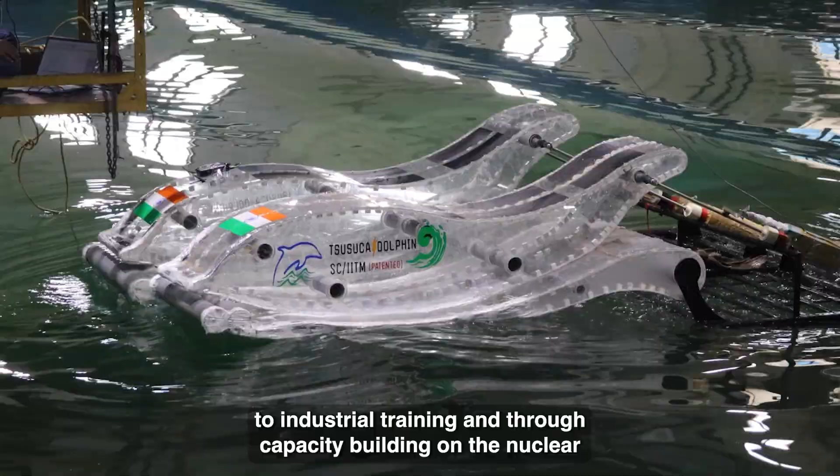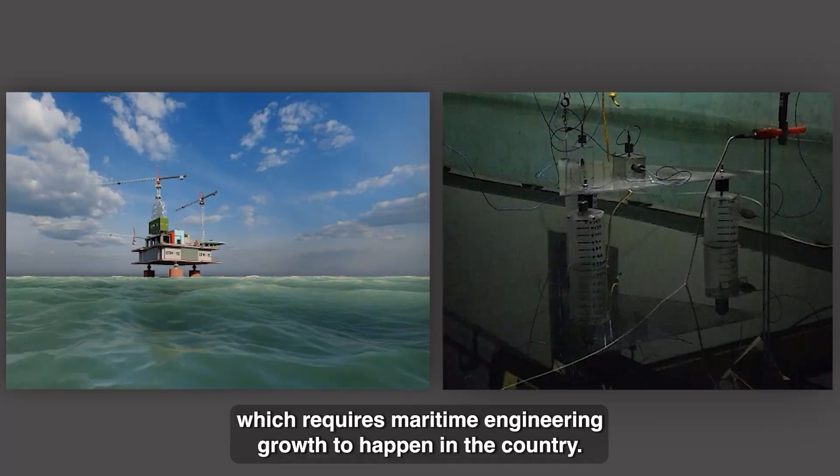This Maritime Engineering program is a very special multidisciplinary program with input from mechanical, civil, structural, aerospace, naval architecture, chemical engineering, electrical, electronics, and applied mechanics. This program is completely different, dedicated to industrial training and thorough capacity building on the new trade of the maritime sector. It's a growing economy which will give a lot of job opportunities and research frontiers as India grows, and the Blue Corridor effect planned by the Government of India is one of the important missions which requires maritime engineering growth. This program caters to that expected capacity building.

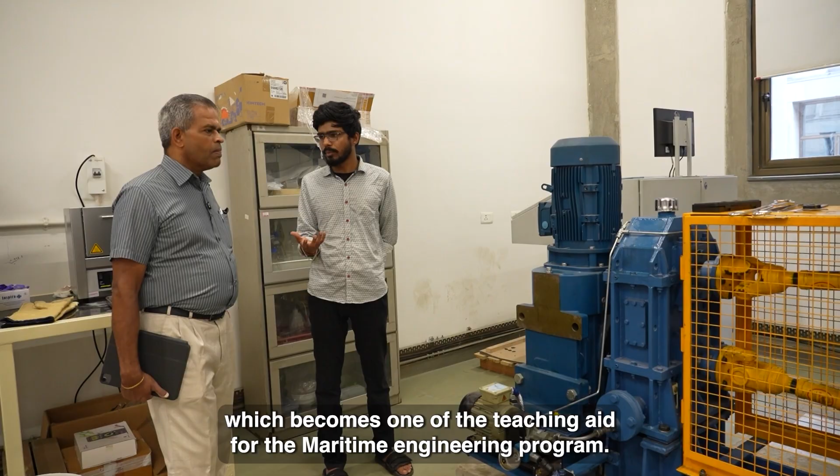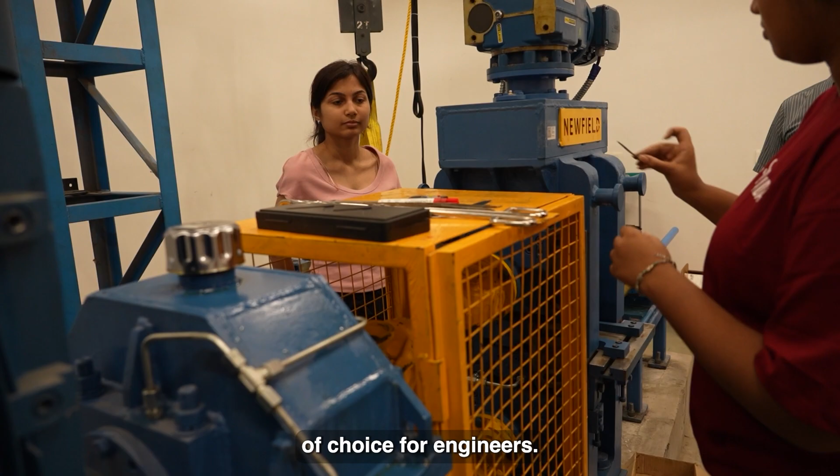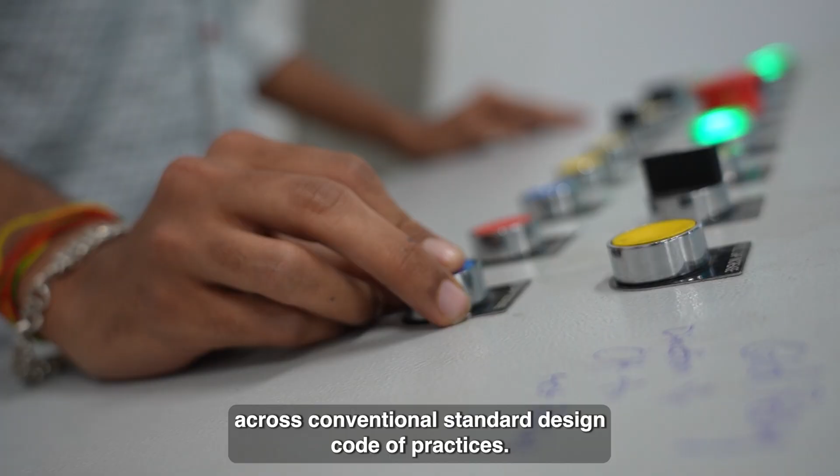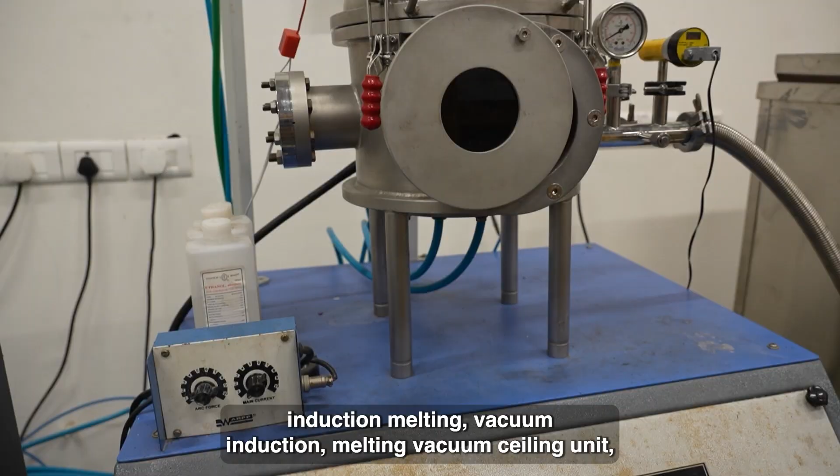This is part of the material science engineering laboratory which becomes one of the teaching aids for the maritime engineering program. When we talk about materials innovation in the maritime industry, concrete and steel have been conventional choices for engineers, but we also have titanium vessels and high-speed craft boats made of fiberglass. These are advanced materials that do not fall under conventional standard design codes of practice. We conduct box furnace tests, tube furnace tests, vacuum arc melting, induction melting, vacuum induction melting, and vacuum sealing, all present in this small segment of the material science laboratory.

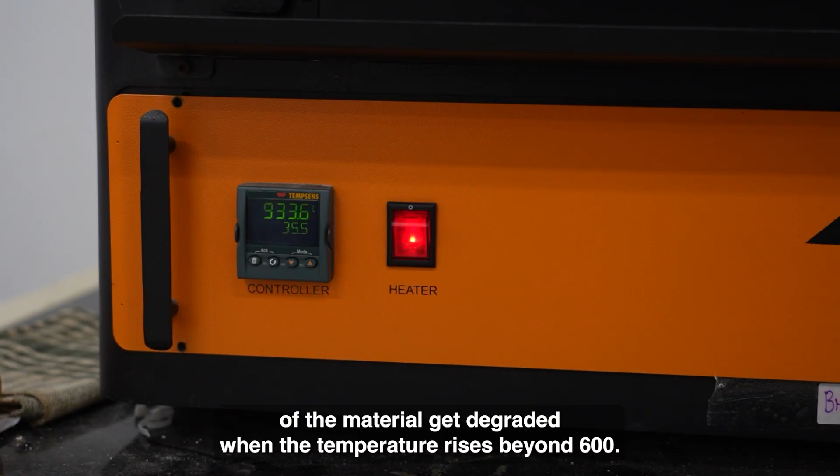A typical furnace's operating temperature for testing specimens can go as high as 1200 degrees Celsius. Generally at room temperature and ambient conditions, mechanical properties will not alter much, but as you'll see in the course lectures, the strength of the material degrades when temperature rises beyond 600 degrees. Therefore, for fire resistant design, you must choose an alloying element such that the strength doesn't degrade beyond 600 degrees Celsius.

Welcome to the ambience of IIT Madras Lecture Theatre. This is one of the interesting classrooms where maritime engineering classes will be conducted. We have state-of-the-art projection facilities and good audio-visual recording systems. Once the lecture is over, we can generate PDF files directly and email them to your email IDs. It's a state-of-the-art facility where lectures are recorded for a lifetime and shared with students immediately. This is the IIT Madras library.

The library has collections of books referred to as standard textbooks and references for the course and program. It also has a lot of online editions of design codes of practice and reference materials, plus e-collections of various video lectures from international courses and programs related to maritime engineering.

We will be taking you around to the advanced material manufacturing units, so you will have state-of-the-art facilities available at IIT Madras. Welcome to the program to join MTech and PhD at IIT Madras Maritime Engineering. Please try to enjoy and take advantage of this to the maximum. Welcome to the program and welcome to IIT Madras.

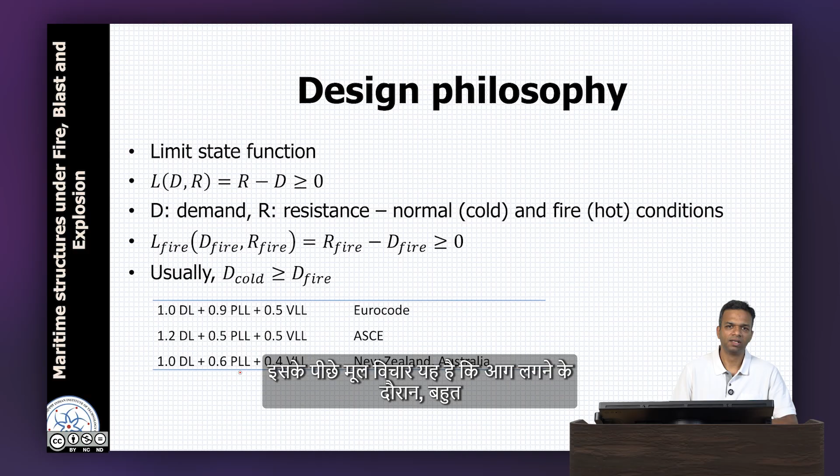Several building codes specify the partial load factors for fire limit states, and the main thing to notice here is that for permanent and variable live loads, the factors are generally lesser. The basic idea is that during a fire, a lot of combustible items begin to burn, and hence their mass, which was acting on the structure earlier, is no longer there. Hence the overall load reduces.

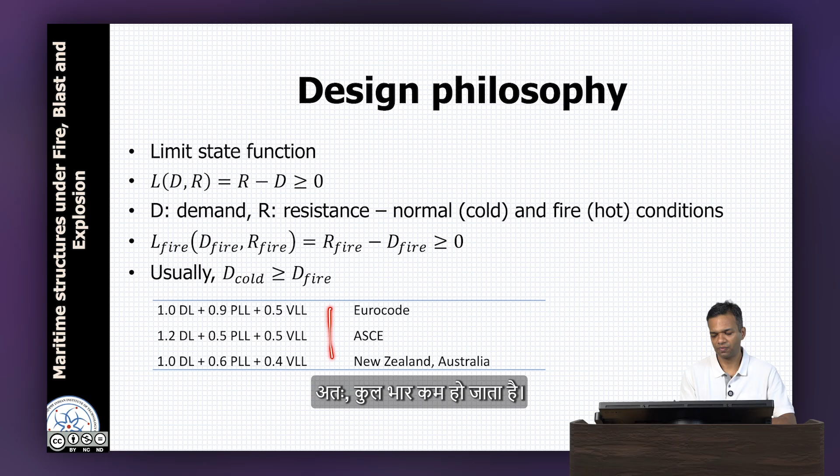So the design under fire scenario entails the following things. One is reduction in load demand. This reduction happens because combustible items are getting burnt away. Also, people living in the building would have been evacuated before the fire intensifies. After the fire intensifies, which is the post flashover stage, it becomes important from a structural point of view.

Then there will be additional internal stresses or strains due to thermal effects. We saw that a member can expand, and if restrained, this expansion leads to additional stresses. These additional stresses may cause yielding as well as buckling. For non-uniform exposure, it can cause thermal bowing or curvature due to thermal effects.

Then we saw that generally the strength of materials reduces with increase in temperature. We have seen this in detail for steel structures. In this lecture, we will consider concrete as a material, and we will see how material properties of concrete change with temperature.

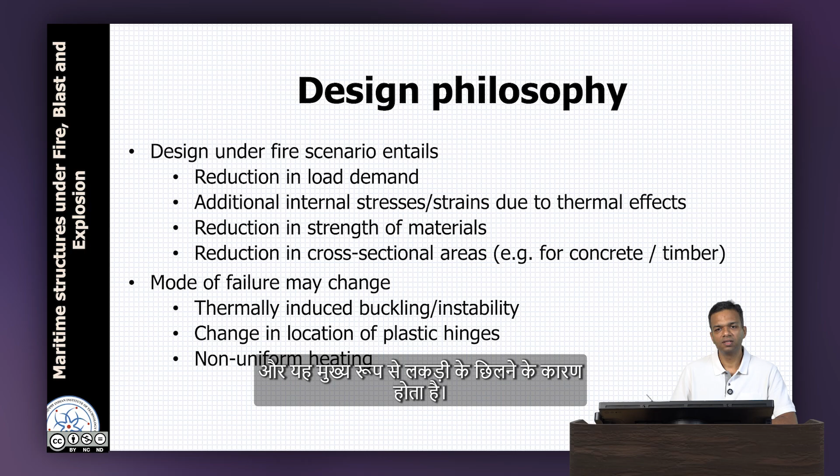One very important aspect for RCC structures is that there can be a reduction in cross-sectional areas, and this predominantly happens due to spalling. So if we have an initial cross-section of a beam like this, exposed to fire on 3 sides, which is a typical fire exposure condition for beams, then some parts of the concrete which are exposed may spall. What I mean by spalling is that chunks of concrete can fall away.

Why does this happen? This happens due to pore pressure. Any concrete has some amount of moisture content within it, which at room temperature remains in liquid form, whether it is physically attached water or chemically attached water. At higher temperatures greater than 100 degrees Celsius, typical for fire situations, this liquid water becomes vapor and tries to expand significantly. Because of this expansion, it exerts tensile stresses within concrete, and concrete, being weak in tension, undergoes tensile cracking, and fragments of concrete can spall off. This is where reduction of cross section can happen for concrete structures.

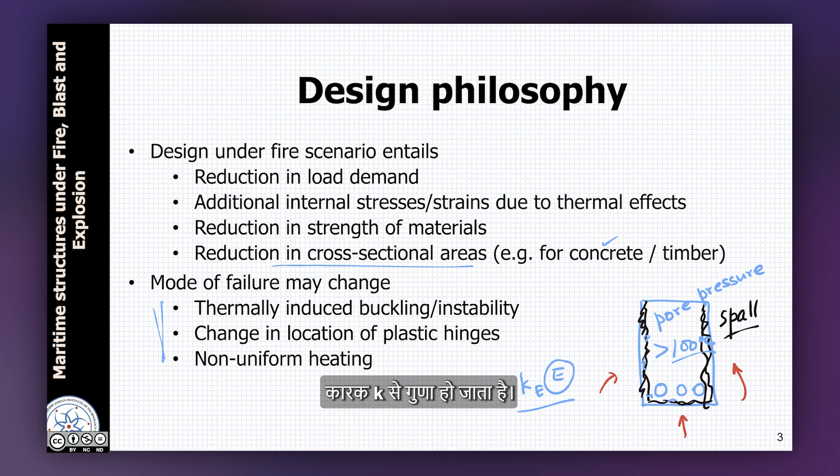All right, so let's move on to material properties of concrete. First, we are looking at concrete under compression, because compression is the main load carrying capacity component which comes from concrete. This particular table is coming from the Eurocode. In the first column here, this is the concrete temperature. As of now, the two columns we will look at are the second column and the fifth column, which is a ratio of Fc theta divided by Fck.

Now Fck, as you already know, is the characteristic strength of concrete, and Fc theta is the strength at a temperature theta. So what we are implying is that Fck, when we say characteristic strength, this is at room temperature, or depending on lab conditions, generally considered to be 20 degrees or 25 degrees.

The other differentiating factor is the nature of aggregates. This particular set of columns is for siliceous aggregates, and this particular column is for calcareous aggregates. Siliceous aggregates, as you would know, is silica based, so this has mostly SiO2. Some examples of stones whose crushed fragments become siliceous aggregates can be quartz or granite. Calcareous aggregates are based on calcium carbonate, calcite being an ore of calcium carbonate, and a very common aggregate which is used and is calcareous is limestone, or rather fragments of limestone.

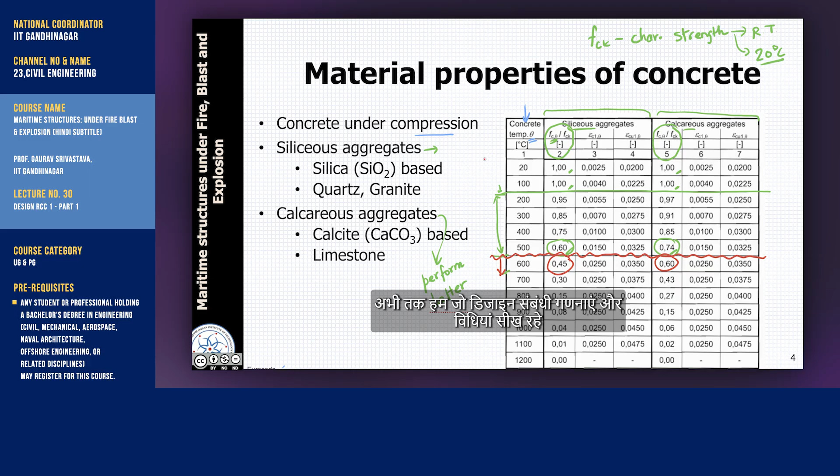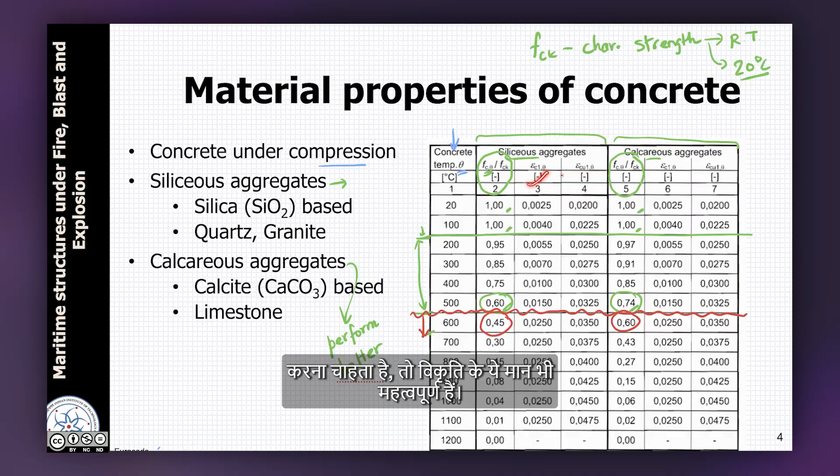Now this table has two other columns giving strains. These will become useful when we are interested in the stress-strain graph of concrete. For the design calculations and methods we are learning, as of now it is not required, but if one wants to do advanced calculations with respect to concrete structures, then these values of strains are also important.

Now, concrete, although it has very low strength in tension, still has some strength. So generally for most design we do not consider the tensile strength of concrete. However, if it is necessary in any application, the Eurocode also gives the variation of the ratio of tensile strength. This KCT is the ratio of concrete tensile strength at temperature theta divided by the concrete tensile strength at 20 degrees Celsius, or room temperature.

Here also you will notice that up to 100 degrees there is no change in strength, and this is predominantly governed by evaporation of water. After 100 degrees there is a linear decay - obviously experimental data will be above and below this, but this is a general regression line. And if we were to draw a line at 50% of the strength, we see that at less than 400 degrees, the tensile strength reduces by more than 50%.

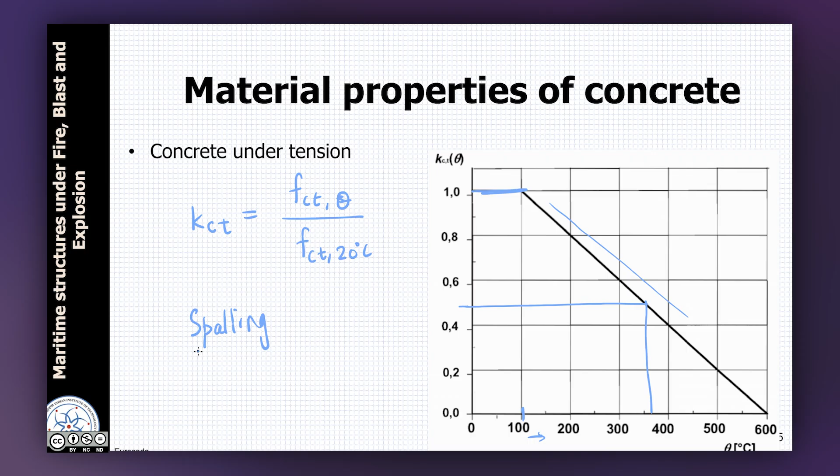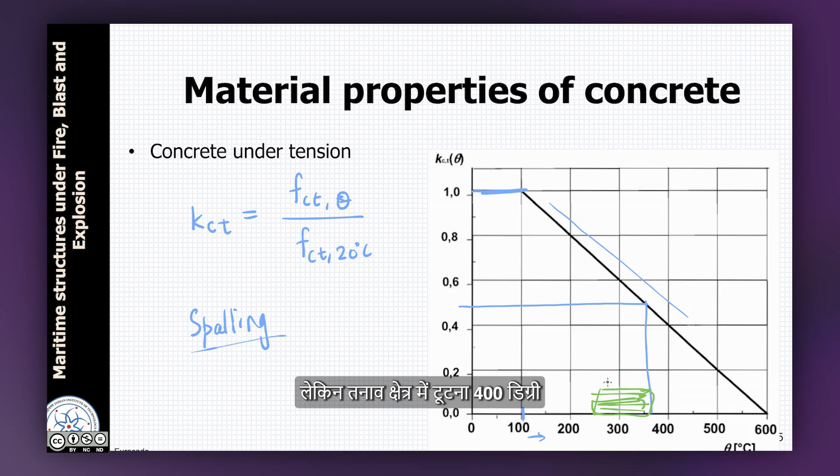So for this reason, spalling can initiate even in the early stages of temperature exposure, because the tensile strength is dropping very fast. So even though the concrete may continue to carry load, tensile zone spalling can begin much before 400 degrees Celsius.

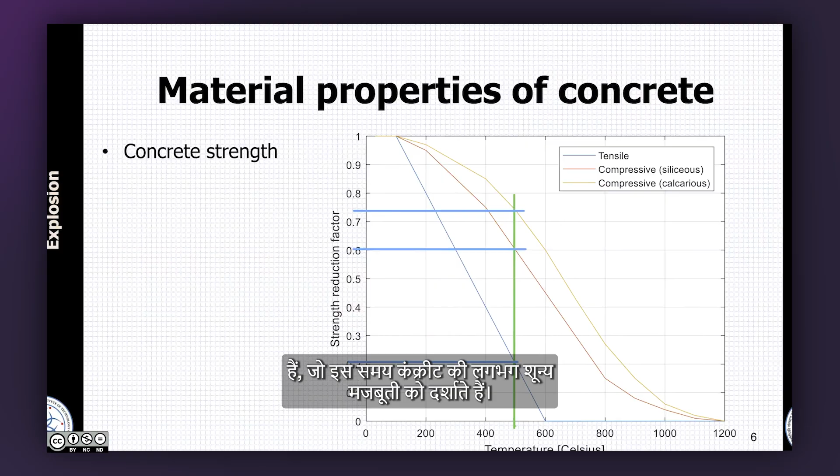So if you go to 900 degrees here, we see that the strength of concrete available at that point in time is about 15% only. So for that reason, it is practically entirely gone.

Intermediate temperatures are shown here, and some slight discoloration can be seen, although the discoloration itself is not a very reliable metric to infer what temperature the concrete would have seen if you are doing a post fire analysis. An analysis from a strength point of view or from the X-ray diffraction point of view, which gives out which minerals are available, which minerals are not available, those kind of metrics are better.

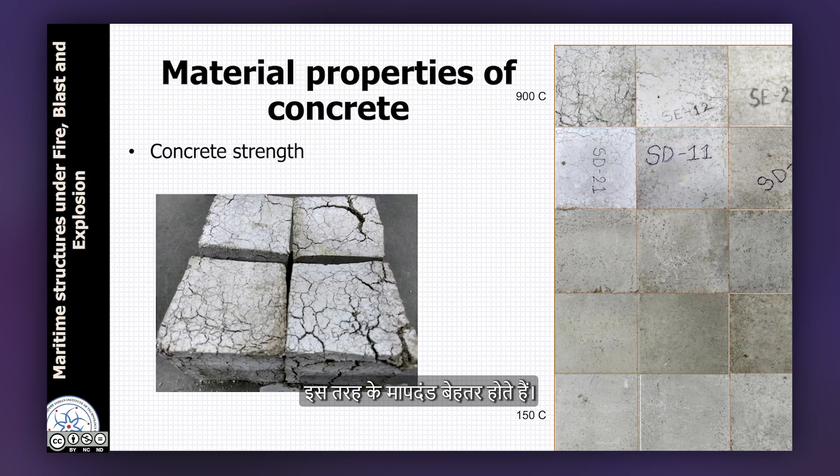Those were the mechanical properties. Then for Wickstrom's method for thermal calculations, we also need thermal properties of concrete. Since water is present in concrete even after curing, the water content plays an important role in its specific heat.

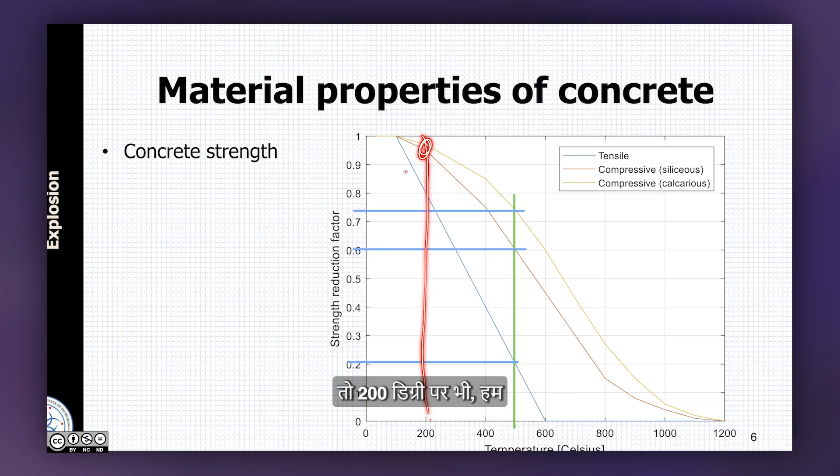Now from a modeling point of view, this particular zone may or may not be modeled depending on the applications, because if we see the strength curve, up to 100 degrees there was no change in strength, and up to 200 degrees also there is not much change. So 200 degrees is still almost 97%, 95%. So oftentimes it is possible to take a constant specific heat for concrete when we are doing thermal modeling, because it simplifies the analysis process.

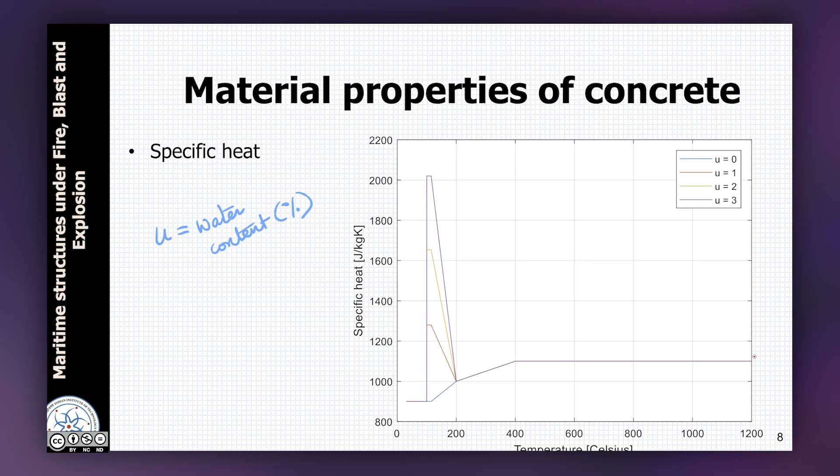Unlike steel, in concrete, the density also becomes a function of temperature. As we know that concrete is composed of multiple materials, all of them decay or decompose or vaporize at different temperatures, and that is the reason the density will reduce as a function of temperature. So in this zone, which is 100 to 200, water will evaporate, CSH gel begins to decompose. CSH decomposes quite a bit. Then there is CaCO3, or calcium carbonate decomposition which happens, and that basically continues.

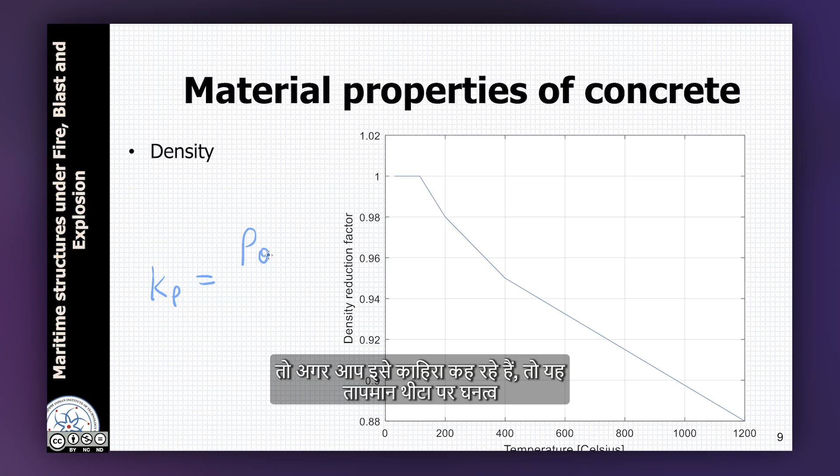So if you are trying to model heat transfer more accurately, it is better to consider the density reduction factor, and the reduction factors are always defined in a similar manner. So if you are calling this K rho, this is density at a temperature theta divided by density at 20 degrees Celsius. One thing more you will notice is that the drop is also not extremely high, only about 12% up to 1200 degrees. So if you are looking at up to 1000 degree temperature, the drop in density is only about 10%. So this can be modeled or can be left out depending on the choice of designer.

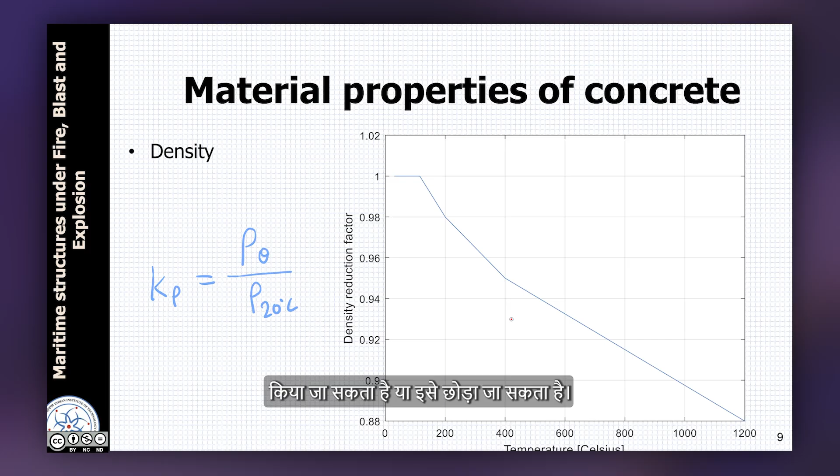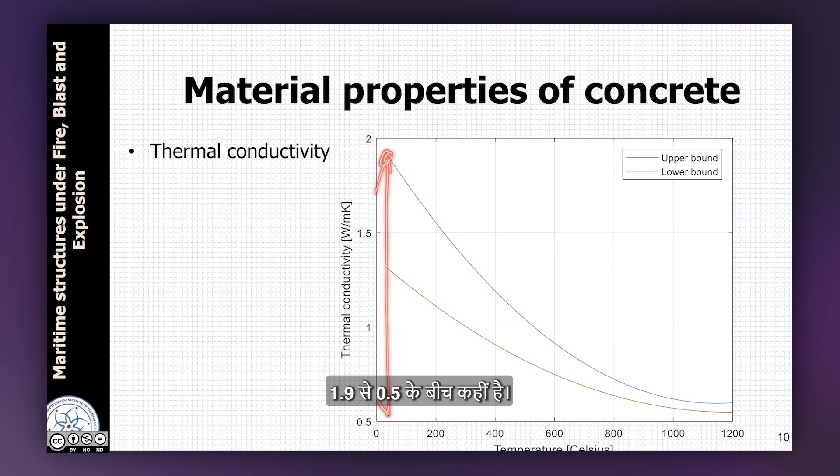Then we have thermal conductivity. Thermal conductivity generally is seen as two things, a lower bound and an upper bound, and this also happens because there is a wide experimental spread around this, so a lot of experiments done. The conductivity of concrete depends a lot on its composition, and it is especially true for lower temperatures when a lot of thermal decomposition and vaporization has not happened, the variability is higher. Whereas when we go to higher temperatures, the leftover materials are more standardized or similar, so the thermal conductivity becomes more harmonized. In any case, the overall range is somewhere from 1.9 to 0.5 watt per meter Kelvin.

These were the properties of concrete. But all concrete structures are reinforced generally with steel, so we have to discuss material properties of reinforcing steel also. In reinforcing steel, mainly the parameter we worry about is strength.

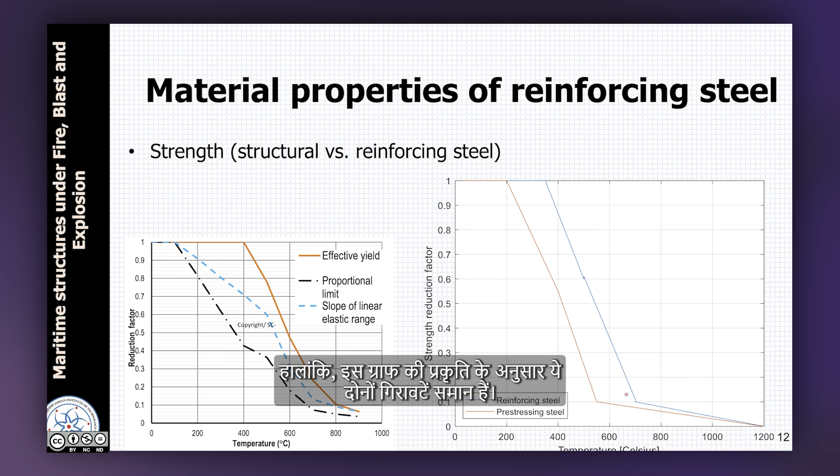Now with material properties discussed, we can talk about the assumptions in thermal analysis for RCC structures. We have already discussed in a previous lecture that a semi-infinite type idealization can be used for concrete, meaning temperature on the surface is something, but temperature away from the surface is not affected by the surface temperature. One can calculate penetration depth, how deep it goes in how much time.

Using these ideas, Wickstrom's method was developed, which enables us to calculate temperatures of insulating materials, or in this case reinforced concrete materials for structures, when exposed to the ISO 834 graph. ISO 834 is the time temperature standard curve used to determine fire rating of different systems, which can be strength fire rating, insulation rating, or integrity rating.

Similarly for steel, for rebars which are steel members, we can consider a lumped capacity. In addition, for reinforced concrete, whatever is the temperature around this bar, we can say the bar also is of the same temperature. So all the reinforcement bars are at the same temperature as the surrounding concrete.

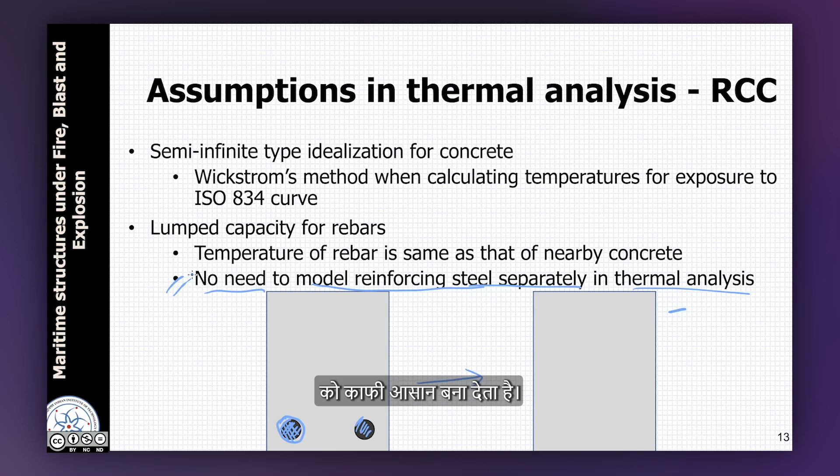So practically, for the purpose of thermal analysis, we do not need to model any rebars. There is no need to model reinforcing steel separately in thermal analysis. This idea significantly eases the thermal analysis, so all we have to worry about is the overall geometry and shape of the concrete part.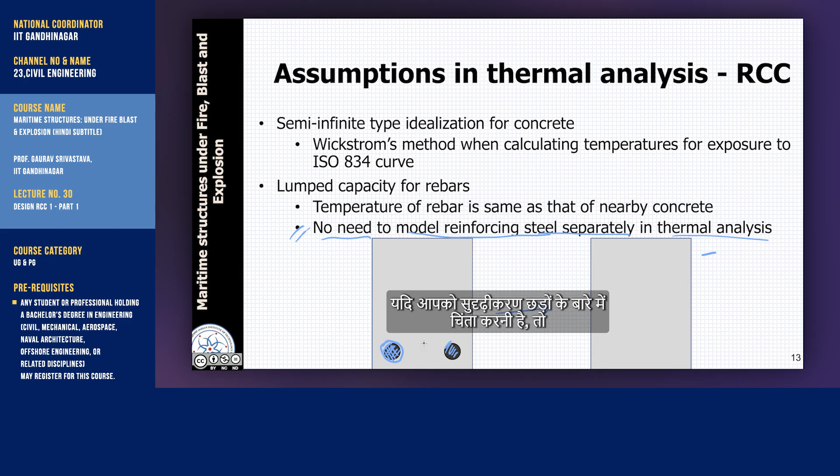If we have to worry about reinforcement bars, the complications become quite high, because reinforcement bar sizes are small, so the mesh size has to be really small to capture anything. And this is a very simplified case - in reality there will be bars on the compression side, stirrups, and all of that, so modeling all of this becomes very challenging. This is why, for thermal analysis, we are able to model only the concrete part and leave out the steel part.

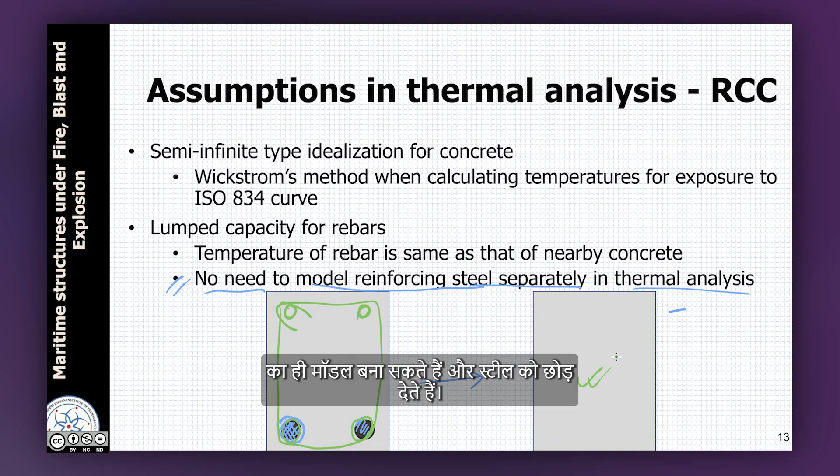When we did a thermal analysis example, we came across this kind of contour diagram. This is a contour of temperatures at 1 hour exposure. We did only the left half of the beam, because when this is exposed to fire on 3 sides, there is a line of symmetry at the center.

Which means we can model only the left half and take a mirror image for the second half. In the same section, we will have rebars, located say like this. This is for compression, and this is for tension. There will also be stirrups.

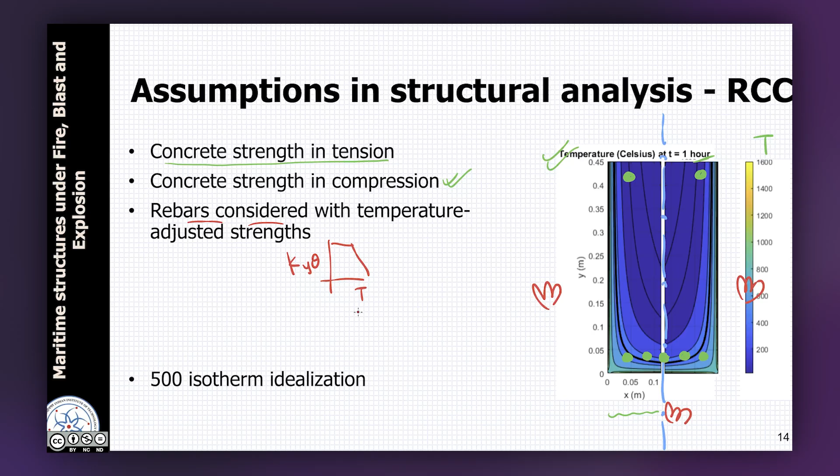How do we get that? We can just get the coordinate location of where the rebar's centroid is, and from this temperature contour, which is for the concrete section, we read out the temperature. So for the ith bar, we can get the rebar temperature directly from the contour of temperature distribution in concrete.

So we have done the calculation of temperature without considering any rebars. Then we draw the contours, and from the contours we read out the temperature at the coordinates where the centroid of the rebar is located, and that becomes temperature of the rebar. Based on that temperature, we can find out the reduction strength factor, and that reduction strength factor is eventually considered for design.

Now, when we were discussing the temperature based properties for concrete, we saw that 500 degrees Celsius was a temperature which was important, from the point of view that for most concretes beyond 500 degrees, we can say half of its strength is gone. So from there, a simplified design methodology comes in. This one is called 500 degree isotherm idealization, and this is one of the key ideas in Eurocode.

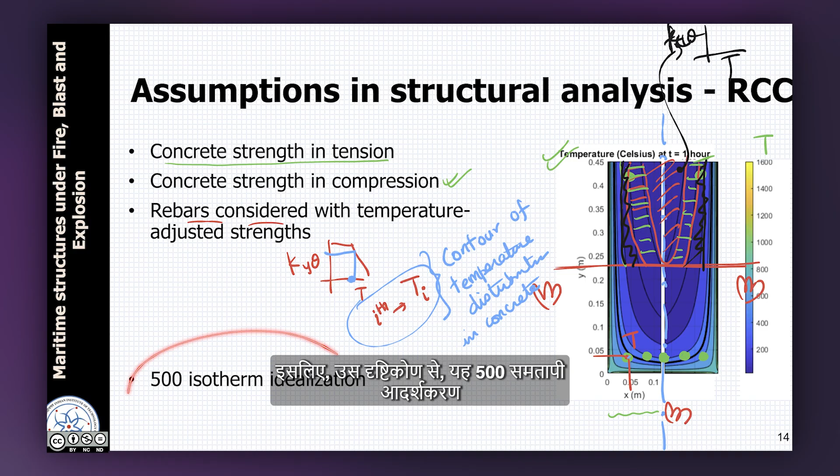So from that point of view, this 500 isotherm idealization is a very useful idealization. Let's look at it. It postulates two very easy to use stipulations. First, concrete within the 500 degrees Celsius isotherm remains unaffected, which means it has full strength, whereas concrete outside the 500 degree isotherm has zero strength, which means it is to be ignored.

So let's look at it from an illustration point of view. Say this is the thermal analysis that we are doing. This gives us contours of temperature. From these contours we pick the contour where temperature is 500 degrees, so this is the 500 degrees Celsius isotherm, and you may recall that isotherm means a line on which temperature is same. So what this method says is that concrete inside the 500 isotherm has full strength, and concrete outside the 500 isotherm has no strength.

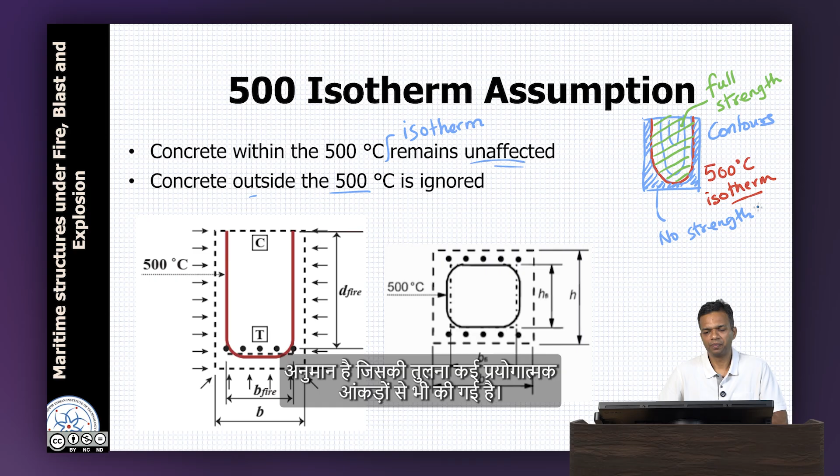This is a simple assumption or approximation that has been compared with a lot of experimental data, and especially for beams it has been found to be very accurate. It enables us to bypass a lot of complicated calculations, and we will see how we use this for analysis.

The illustration shown here is an example of a beam. When we draw this red curve, this is the 500 degree isotherm, which is the new location of effective concrete. Obviously there will be a neutral axis also.

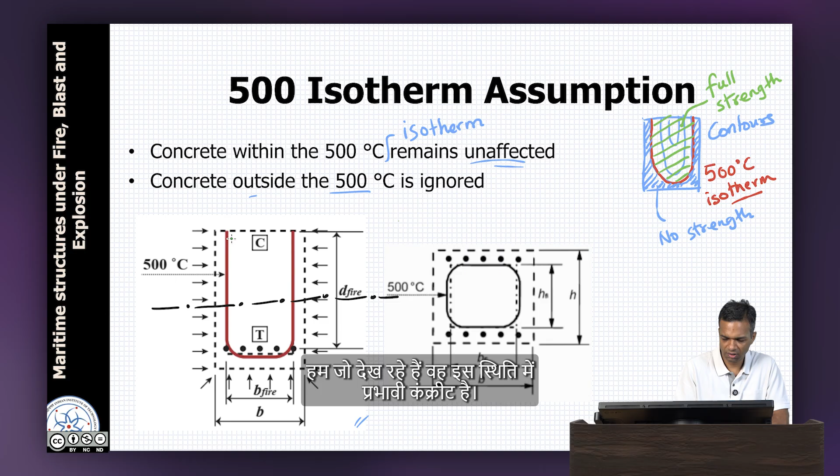What we are saying is the effective concrete under this situation is this. So in the compression zone only, this is the effective concrete, and here strength remains FCK without any reduction. The outside concrete has zero strength, as if the boundary has come back.

However, I would like to note that although it has zero strength, for thermal analysis purposes we do not change the boundaries, which means for thermal analysis this outer boundary still remains. But only from structural analysis point of view,

this is the effective section in concrete compression. So, if the original width of the beam was B, there is a new width now, which is called B fire, and B fire is simply B minus this distance plus this distance.

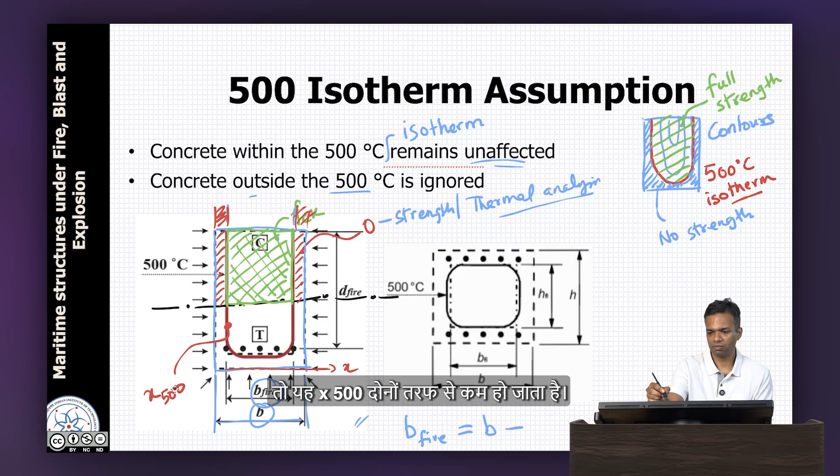Since this is a 500 isotherm, if we say that the horizontal direction is the x axis, this distance here can be called x500, or the x coordinate of the 500-degree isotherm. So x500 gets reduced from both sides, so B fire is B minus 2 times x500. This is how this idealization helps us in doing this.

We will talk about this D fire when we do examples, but the general idea is that there is a D which is under cold conditions, which is the distance from the compression fiber to the centroid of the rebars. But as these bars get heated up and their strength changes, this D can change because the centroid of the rebars themselves can change.

Now, a similar concept — this particular thing that we have seen is for a beam which is exposed on 3 sides to fire. A similar concept can be seen for columns, where if a column is exposed on all 4 sides, this is the nature of the 500-degree isotherm method.

And just like in case of beams, we will define a B fire and an H fire or D fire, whatever you want to call it. The idea remains the same, that concrete inside this 500 isotherm has full strength FCK. Concrete outside is not effective, zero strength.

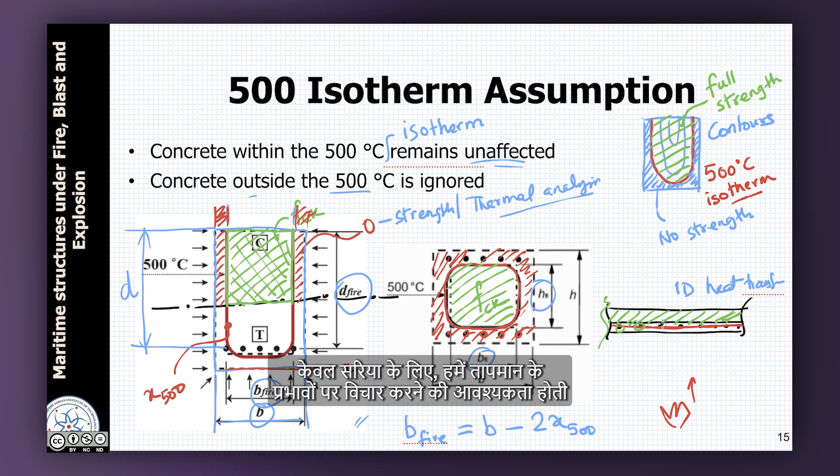So, since this is a one-dimensional heat transfer, generally the 500 isotherm will not go above the neutral axis in this case. So generally it does not affect the analysis as much, except for the fact that for rebars only we need to consider the temperature effects.

Now, let us look at design of beams. Before we go to the fire design, we will quickly review the section behavior in flexure. So what we have here is a section. For a moment, let us say this is not B fire, this is only B. So the original width of the beam is there and original depth of the beam is there, capital D.

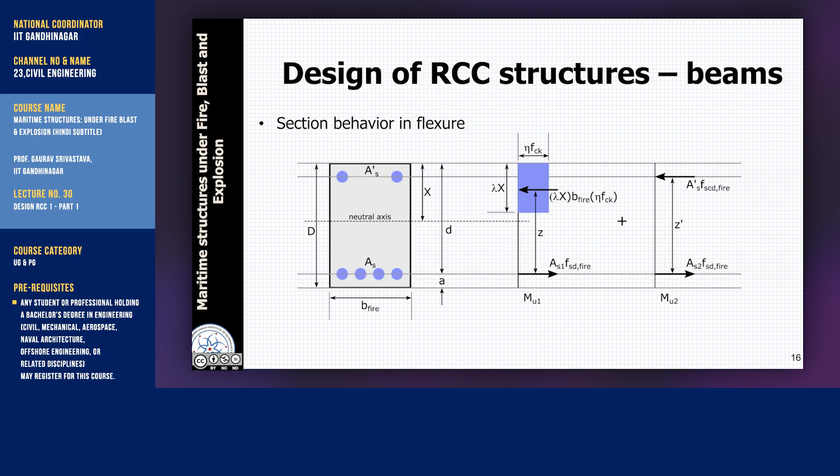We define a distance small a, which is from the bottommost fiber to the centroid of the rebars, that is the centroid of the tension rebars. Then from the topmost compression fiber we define a distance small d. This small d is the effective depth, and we know effective depth is small d equals capital D minus A.

Then we also define x, which is the depth of neutral axis. So x is the depth of neutral axis, which is usually calculated when we equate the compression forces to the tension forces within the section.

Now, one of the simplifications which helps us in fire design calculations is the stress block of the concrete in compression. In IS 456, you would recall that the stress block of concrete is generally taken as this parabolic shape, where this is 0.45 FCK, then we have 4 by 7, 3 by 7 and like that. So this part is constant, here it is parabolic.

But since we saw that when we consider the 500 isotherm method, some part of the concrete here will be gone, and if it is a 4-sided exposure in case of a column, then like this it will be gone. So this parabolic stress block again becomes more challenging from a computation point of view.

And even with all of this, IS 456 also states that even though this parabolic curve is what is given there, one can use a trapezoidal or a rectangular or any equivalent shape for the stress block as long as the effects are considered properly.

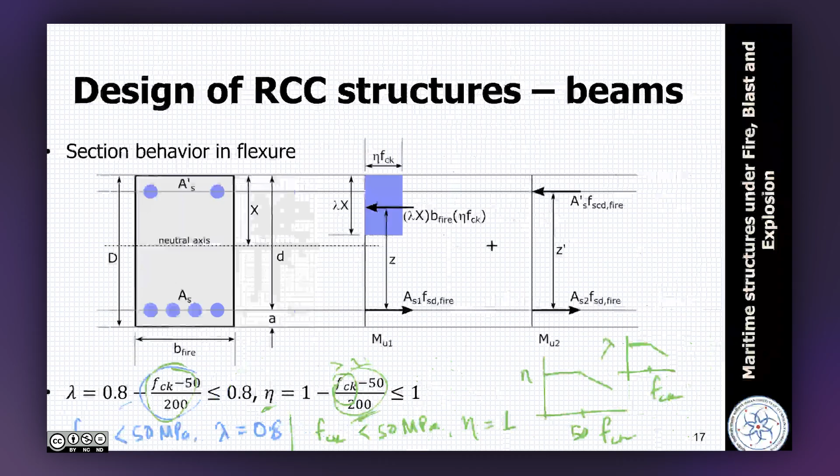Once we have defined all of these, we can calculate the moments mu1 and mu2. Mu1 is the balanced section moment, and it can be calculated as AS1 times FSD fire. FSD fire is the reduced strength, multiplied by Z, which is the lever arm. AS1 is the total area of steel in tension, which corresponds to the balanced section.

And mu2 can be similarly calculated as AS2 times FSD fire. This is again the reduced average strength of all the tension reinforcement, which corresponds to the compression side reinforcement. This also has to be equal to FSCD fire, because the temperature here can also be more than 400 degrees, which is when the strength begins to reduce. So we consider the rebar strength appropriately for compression steel as well as for tension steel and do the calculations accordingly.

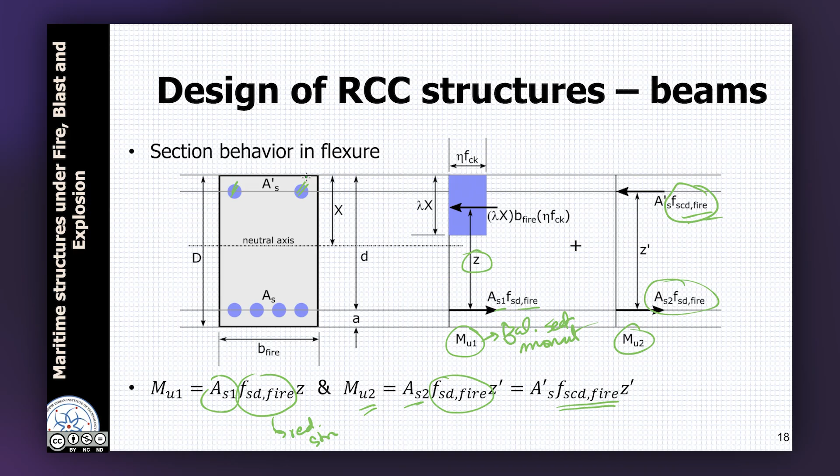One way is that for the section we calculate the temperature at the centroid of each rebar from the concrete thermal analysis, which we designate as Ti, the temperature of the ith bar. From there we calculate the average temperature of all the bars. So for all of these there is a T average for compression bars, and another T average for tension bars. Using this T average, we calculate the average reduction factor.

So one way to define it is like this: the reduced strength is this average factor multiplied by the original strength, and the same thing we can write for the compression side. So FSCD fire is KY average for compression multiplied by FSCD.

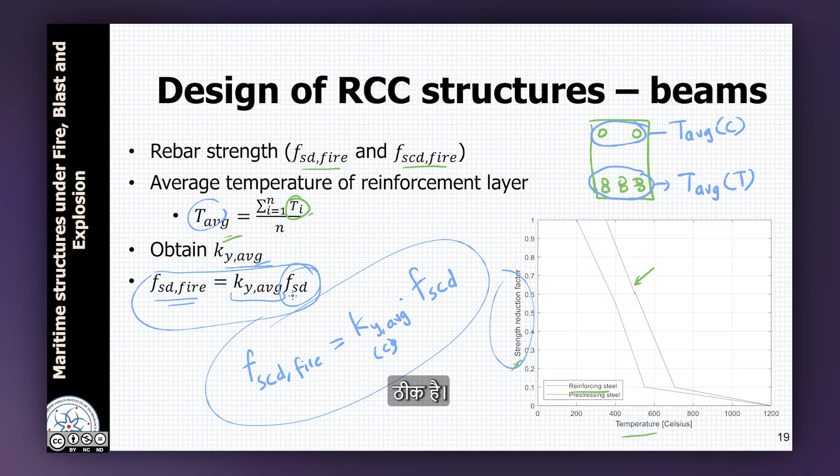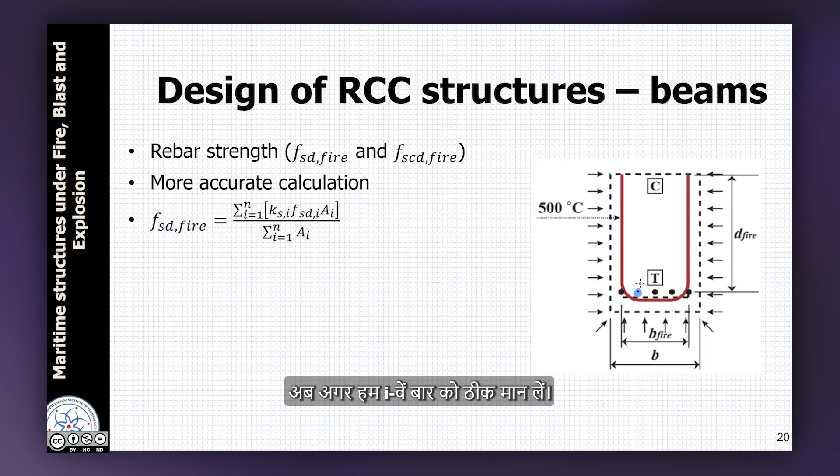However, there can be a more accurate way of calculating this. If we consider the ith bar, let's say AI is the area of this bar, FSD comma I is the cold strength, and KSI is the reduction factor of the ith bar.

Then we can define an area weighted total strength like this: FSD fire equals summation from I equal to 1 to n, where we sum up K times FSD comma I times AI. This is the overall reduced force summation for all the bars, divided by the area of all the bars, which gives a different kind of average FSD fire. This is more accurate and not very difficult to calculate either, so generally this is a better choice.

The same thing can be done for FSCD fire, which applies if you have bars on the compression side. There again we can calculate area, strength, etc. for everything. Now this cold strength generally will be the same, so it will go out of the summation, but area of bars can be different, which is where this more accurate method is better.

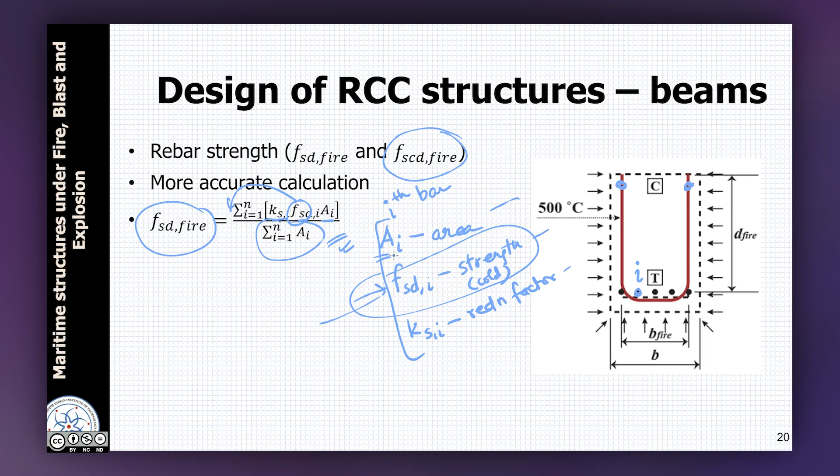And finally, this rebar centroid we have been talking about - the rebar centroid is the distance from the bottom fiber to the centroid of the rebar layer. This is required because we define the effective depth as capital D minus A. Now this A is a centroid. If materials have the same strength, then the centroid can be seen as the geometrical center line.

However, because each of these rebars can have different area and also different temperature, so different strength, the overall centroid may change. Now the overall centroid for a single layer of reinforcement will not change, because all of them are anyway sharing the same centroid. But let's say if we have multiple layers, then the lower set of bars will be at a higher temperature, and the upper set of bars will be at a lower temperature.

So in such a case, for cold conditions, A is generally this. However, under higher temperature conditions, this A may increase, so we will need an A fire, and that is a weighted average. Once we have A fire, then we can define D fire as capital D minus A fire.